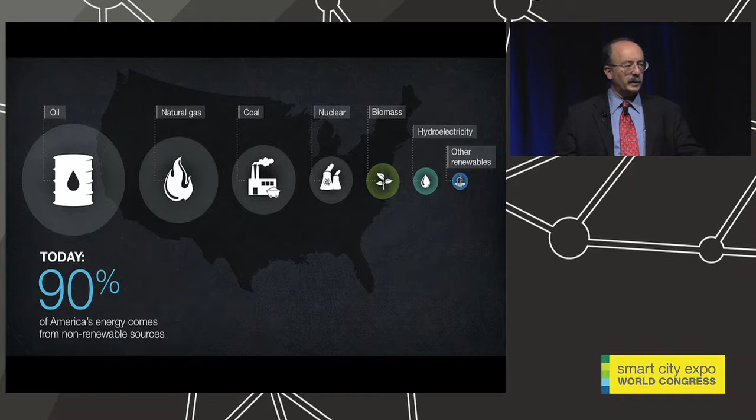4/5 of the world's energy still comes from burning each year 19 cubic kilometers of the rotted remains of primeval swamp goo. As a National Petroleum Council member, I should tell you, and it's true, that those fossil fuels have built our civilization and created our wealth and enriched the lives of billions of people. But their rising costs to our security, health, environment, economy are eroding, if not outweighing their benefits. So we need a new fire.

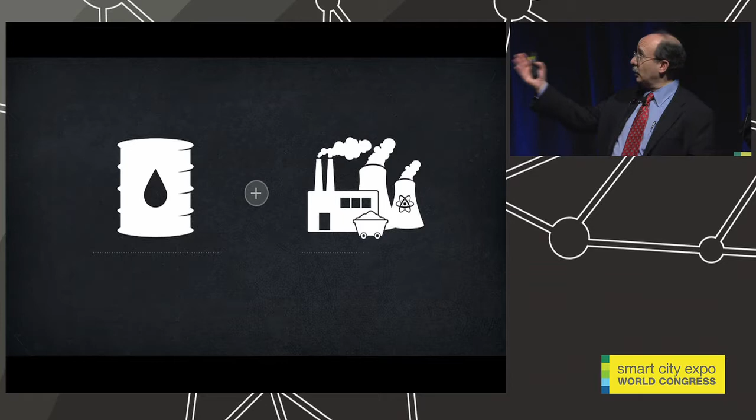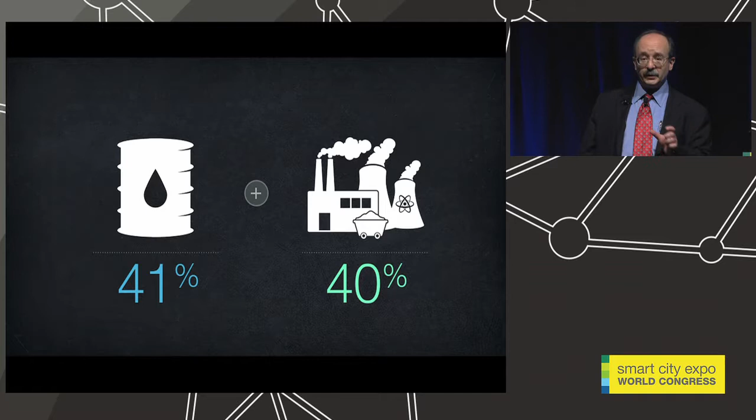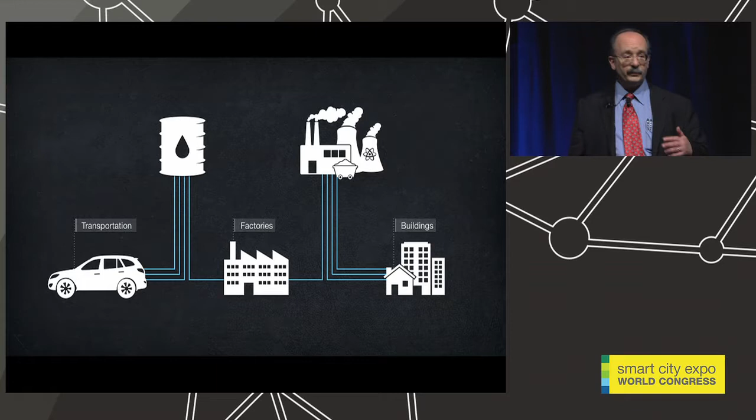And switching from the old fire to the new fire changes 2 big stories, oil and electricity, each of which puts 2/5 of the fossil carbon into the air. These are distinct stories. In my country, they're less than 1% linked, but the uses are similarly concentrated. 3/4 of US oil fuels transportation, 3/4 of US electricity powers buildings, the rest of both runs factories. So very efficient transport and land use and buildings and factories can save a lot of oil and coal and natural gas to displace both.

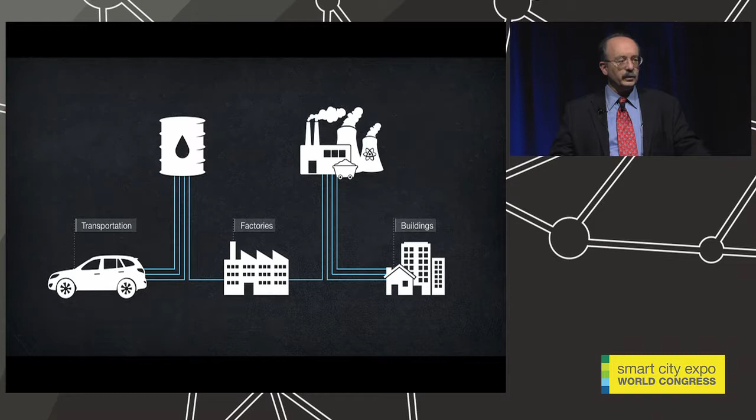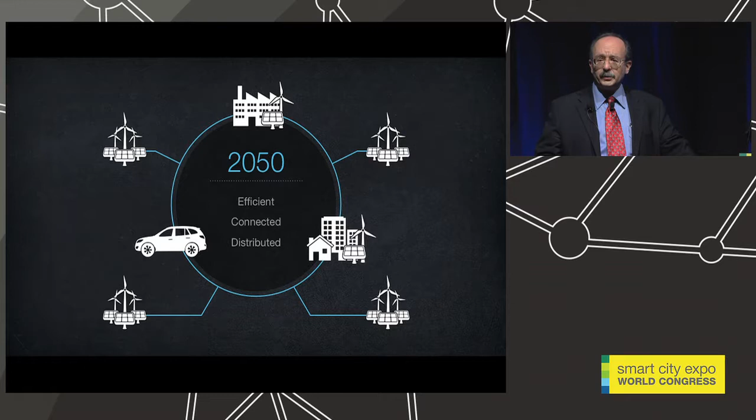But today's energy system is not only inefficient, it's also aging, dirty, and insecure and disconnected, and it needs refurbishment. But by 2050, it could become efficient, connected, and distributed with elegantly frugal vehicles, buildings, and factories, all depending on a secure, modern, and resilient electricity system. So we can eliminate our addiction to oil and coal by 2050 and use 1/3 less natural gas while switching to 3-fold more efficient use and 3/4 renewable supplies.

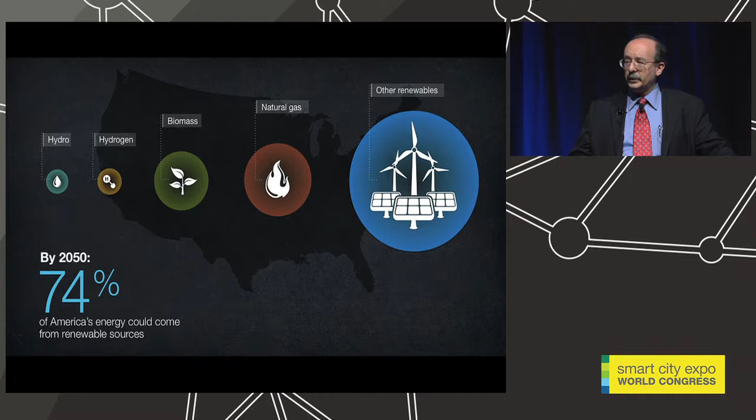That's the transition I'll describe for the United States, but I work in 50-odd countries, and I think you'll find that the US solutions have considerable resonance, opportunity, adaptability to many other societies. Now, by 2050, we found that this transition in the United States, for example, could cost $5 trillion less in net present value than business as usual, counting all external or hidden costs at 0, a conservatively low estimate. And yet this cheaper energy system could support a 158% bigger economy, all without needing oil or coal, or for that matter, nuclear energy.

And this transition would need no new inventions and no acts of Congress, running around Washington gridlock, because instead it's led by business for profit. It uses our most effective institutions, private enterprise co-evolving with civil society, sped by military innovation, to go around our least effective institutions. And whether you care most about profits and jobs and competitive advantage, or about national security, or about environmental stewardship, creation care, public health, climate protection, strong communities, reinventing fire makes sense and makes money.

Now, General Eisenhower reputedly said that expanding the boundaries of a tough problem makes it soluble by encompassing more options and more synergies, including what the solution requires. So in Reinventing Fire, we integrated all 4 sectors that use energy: transport, buildings, industry, and electricity. And we integrated 4 kinds of innovation, not just the usual 2, technology and public policy, but also 2 even more powerful ones normally left out, namely design, the way we combine technologies, and strategy, new business models, new competitive strategies. And these combinations give much more than the sum of their parts, especially in creating some deeply disruptive business opportunities.

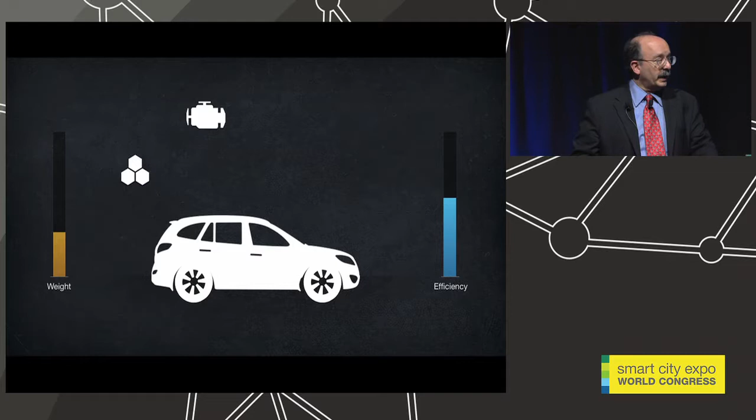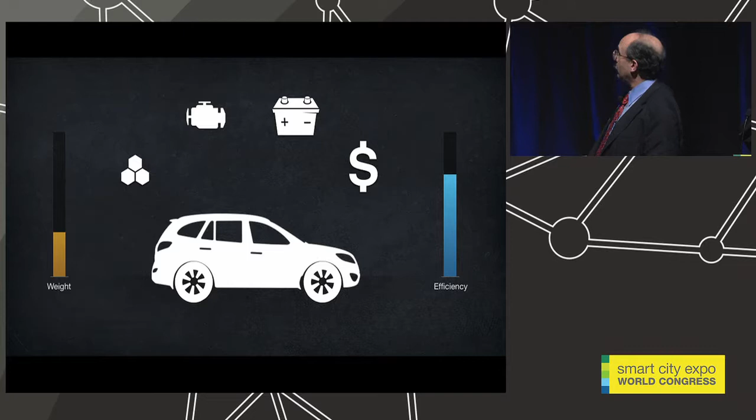Happily, today we have ultralight, ultra-strong materials like carbon fiber composites that can make dramatic weight savings snowball and can make autos simpler and cheaper to build, as I'll explain. And lighter, more slippery autos need less force to move them, so their engine gets smaller. And then you can afford to electrify them because you need about 3 times fewer of the costly fuel cells or batteries. So they get smaller, lighter, and cheaper, and the price of the car converges towards today's value, while the driving cost per kilometer gets much smaller.

So that specific sequence of innovations can transform automakers from wringing tiny savings out of essentially Victorian steel stamping and engine technologies to the steeply falling costs of 3 mutually reinforcing technologies: the ultralight materials, their manufacturing techniques, and electric propulsion. And if you are exploiting 3 steep and synergistic learning curves while your competitor is out on the flat part of one learning curve, you win. This also turns out to de-risk the auto business very substantially.

Now, sales of ultralight electric autos can grow faster and their costs can drop faster with a public policy called feebates, temporarily. That means rebates for efficient new autos paid for by fees on inefficient ones. In its first 2 years, the biggest of 5 European feebate or bonus-malus systems tripled the speed of improving auto efficiency. That was in France.

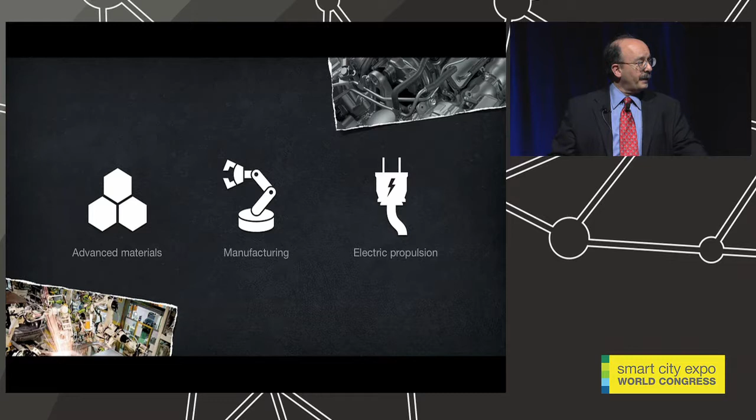And the resulting shift to electric autos is going to be as game-changing as shifting from small refinements in typewriters to the dramatic Moore's Law-driven gains in computers. And of course, IT is now our biggest industry. Typewriter makers have vanished. So vehicle fitness, taking the obesity out of the car, opens up a powerful new automotive competitive strategy that doubles the expected oil savings in 40 years, but also makes affordable the electrification that can save the rest of the oil.

Many different countries could lead this next automotive revolution. The formidable barriers are much more cultural than they're technological or economic, and we're helping both the automakers and the supply chain to tackle them. The current leader is Germany. This year, Volkswagen began ramping up low-volume production of this two-seat carbon fiber plug-in hybrid getting 0.9 diesel liters per 100 kilometers.

And BMW began ramping mid-volume production of this carbon fiber battery electric car. They said its carbon fiber is paid for by needing fewer batteries, and their CEO said, "We do not intend to be a typewriter maker," because he can look across München to where Olympia used to make excellent typewriters. Audi recently showed a carbon fiber plug-in hybrid concept vehicle rated like this one at 0.9 liters per 100 kilometers, but it's an SUV.

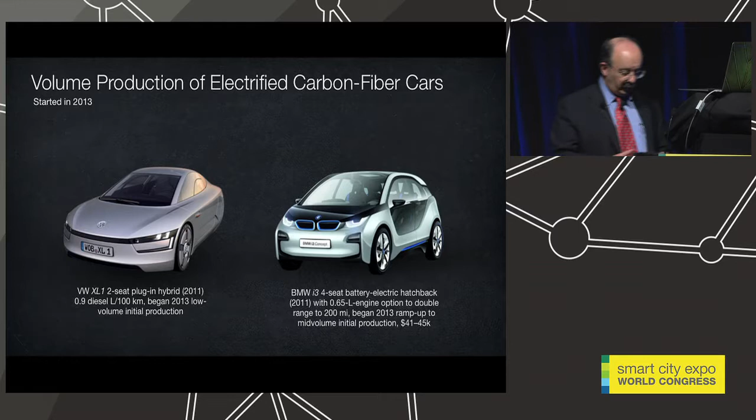Now, 7 years ago, an even faster and cheaper technology developed by one of our spin-offs made this carbon cap in less than 1 minute. And if I hit it, you can tell it's extremely strong and stiff. Rings like a bell. So it's stronger and stiffer than steel, a third the weight, tougher than titanium. Tom Friedman, the journalist, hit it as hard as he could with a sledgehammer and couldn't even make a mark on it. So don't worry about dropping it.

And I brought along another piece that was recently made that's induction welded. And it's now possible to make a 2 by 2 meter complex part with such techniques in 1 minute. So such techniques, which are, in various forms, available now from 17 firms, can scale to automotive cost and speed with essentially aerospace performance. Adoption could save 4/5 of the capital needed for automaking and could save a lot of lives because these materials can absorb 6 to 12 times as much crash energy as steel per kilo.

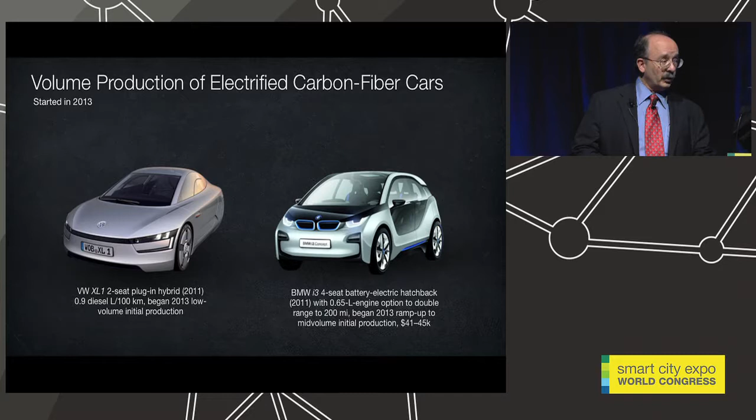And they could save oil equivalent in the US alone to 1.5 Saudis or half an OPEC that we would find by drilling in a very prospective play called the Detroit Formation. There's a lot of negabarrels down there, and they cost $18 a barrel because it's just to pay for the electrification. The ultralighting is essentially free, paid for by simpler automaking and a much smaller powertrain. And of course, the negabarrels are domestic, secure, carbon-free, and inexhaustible.

The lightest announced carbon fiber family car is this plug-in hybrid concept car that Toyota showed 6 years ago. It has the interior volume of a Prius, half the fuel use, 1/3 the weight, 420 kilograms. And that, I think, is a sign of things to come.

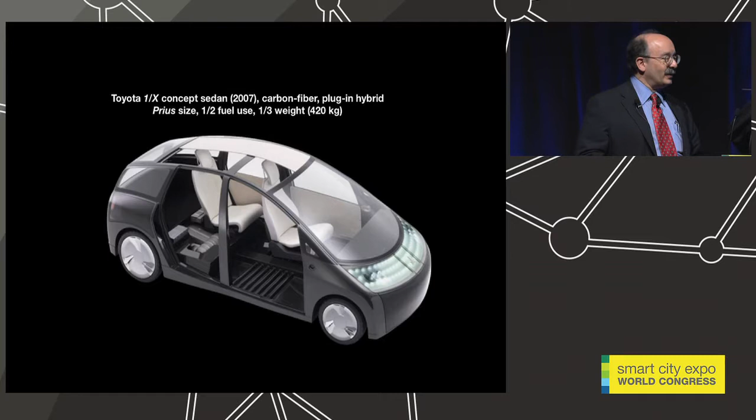Now, the same physics and the same business logic apply also to heavy vehicles. Walmart last year used 44% less fuel than in 2005 to move a case in its giant fleet of heavy trucks. And the full technological potential to improve the Class 8 trucks is a tripling of efficiency. If you combine that with the tripled to quintupled efficiency airplanes being designed at places like Boeing and NASA and MIT, then the US would save nearly $1 trillion worth of fuel on the heavy vehicles.

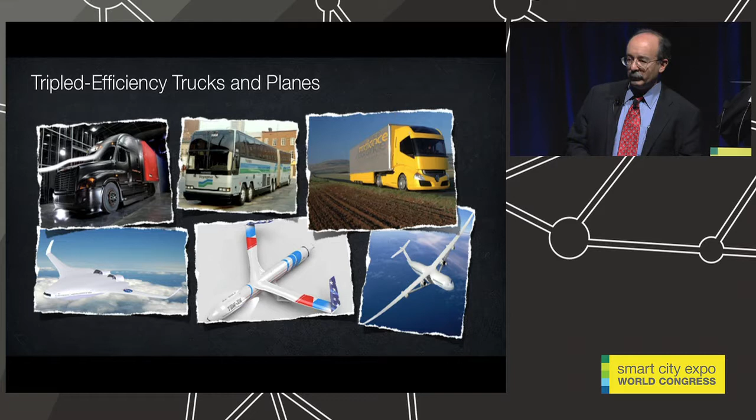And in both light and heavy vehicles, these technical revolutions in efficiency are being driven by the military revolution in efficiency. It's going to make that faster, much as military R&D already gave us the internet, the global positioning system, the jet engine industry, the microchip industry. Only this time it will be leveraging oil savings in the civilian sector, which uses over 50 times as much oil, and that will help get big oil-guzzling countries like mine off oil much faster so that we needn't fight over the oil, and then our warfighters can have negamissions in the Persian Gulf, mission unnecessary. They really like that idea.

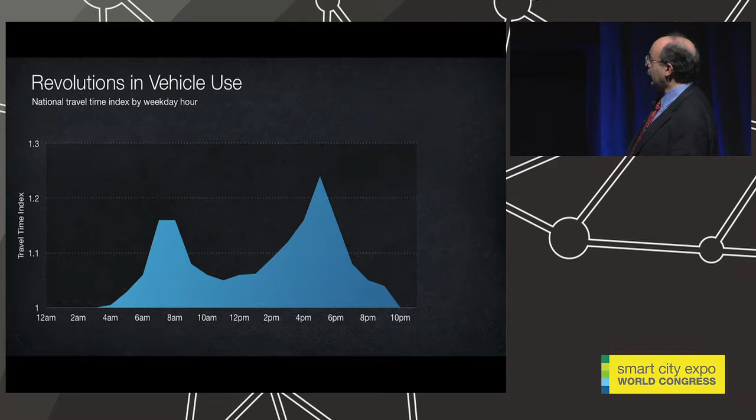But instead of just standing back and watching driving double as officially forecast, we could eliminate needless driving by combining 4 very powerful techniques. Namely, we can charge real-time driving costs per kilometer, not per liter. We can use smart IT to enhance public transport and empower car sharing and ride sharing and smart parking. We can allow lucrative smart growth real estate models that help people be already where they want to be so they don't need to go somewhere else. And that's more profitable for the developer. And we can also use IT to make traffic free flowing.

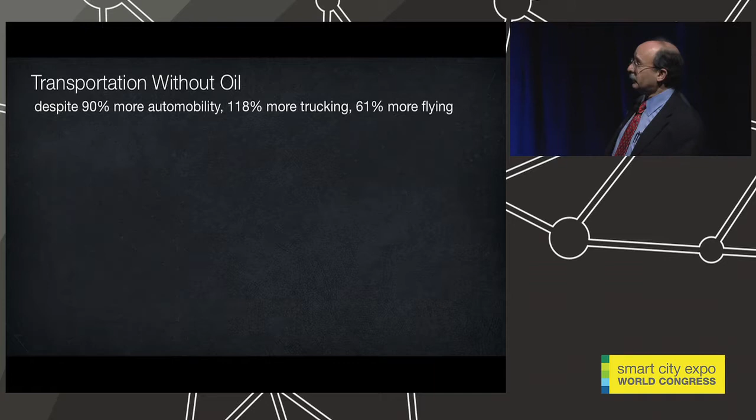So by combining those proven methods, the US could get the same access and mobility or better with 46 to 84% less driving, saving another $0.3 trillion, plus another $0.3 trillion from smarter use of trucks. So 40 years from now, a much more mobile US economy could be using no oil, and saving or displacing each barrel for $25 a barrel rather than buying it for way over $100 a barrel saves $4 trillion net present value. Or if we counted just the hidden economic and military costs of US oil dependence, that would be $12 trillion. And that still doesn't count any costs to health, safety, environment, climate, global stability and development, or our nation's independence and reputation.

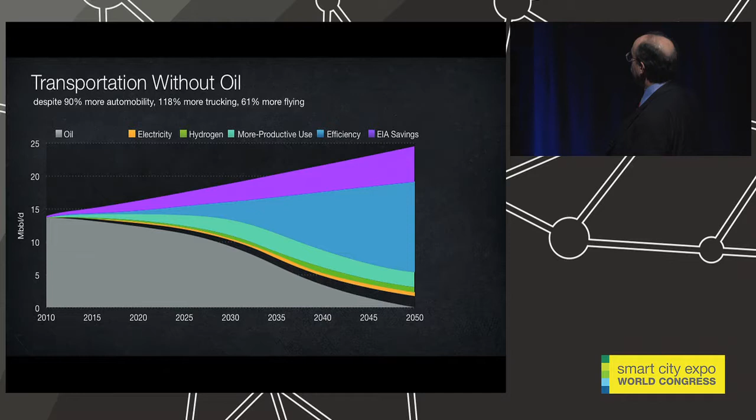So to get mobility without oil, to phase out the oil, we can first get efficient, adding to the government forecast savings the new ones from vehicle fitness and more productive use of vehicles. And then those 1 or 2 liter per 100 kilometer autos can run on any mixture of hydrogen, electricity, and advanced biofuel. The heavy trucks and airplanes could realistically run on advanced biofuel or hydrogen, or the trucks could run on natural gas, but none of them will need oil. And the needed biofuels, if any, are such a small number they could be made 2/3 from waste and without needing any cropland or harming soil or climate.

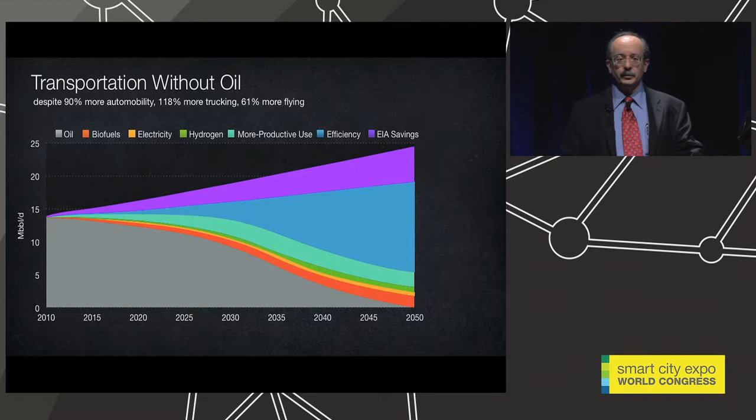So our little team speeds these oil savings by what we call institutional acupuncture. If the business logic is congested and not flowing properly, we insert little needles into selected points in partners like Ford and Walmart and the Pentagon to get that chi, that entrepreneurial juice, flowing properly. And this long transition is well enough underway that even 4 years ago, some analysts were starting to see peak oil not in supply but in demand.

Because as happened to whale oil in the 1850s, oil is becoming uncompetitive even at low prices before it becomes unavailable even at high prices.

But the electric autos that help that happen need not add new burdens to the electricity system. Rather, when smart autos exchange electricity and information through smart buildings with smart grids, they add flexibility and storage that help the grid accept varying solar and wind power. So it becomes easier to solve the auto and electricity problems together than separately.

And the electric autos also converge the oil story with our second big story: saving electricity and then making it differently. These twin revolutions in electricity promise more numerous, diverse, and profound disruptions than in any other sector, because we've got 21st century technology and speed colliding head-on with 20th and even 19th century institutions, rules, and cultures.

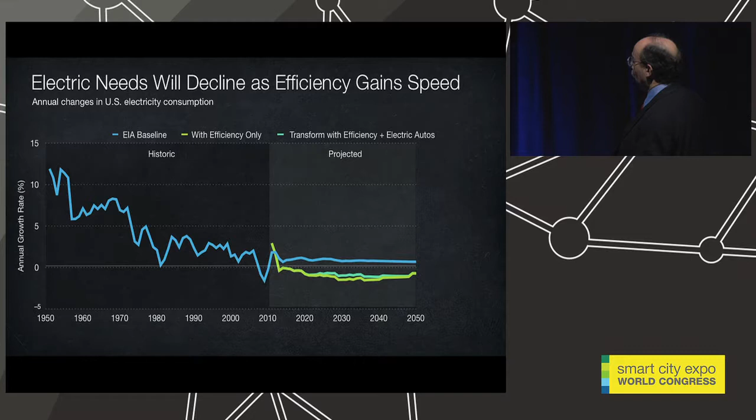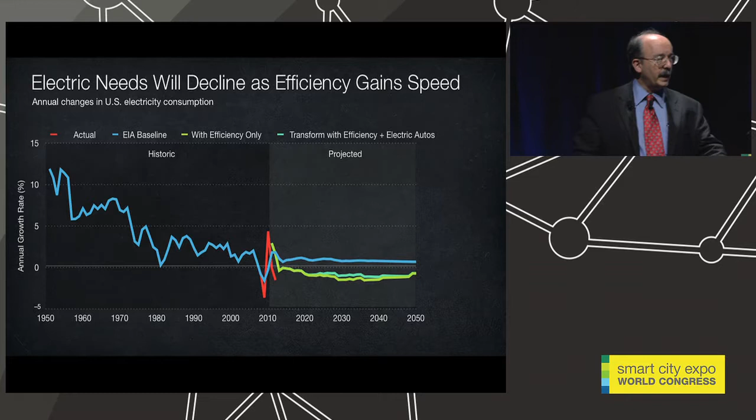Something like this, only more so, seems to be already happening, because last year alone in the United States, the weather-adjusted electricity used to make a dollar of real GDP fell by 3.4% in one year. Unprecedented. But we can keep demand dropping by reasonably accelerating existing trends.

Over the next 40 years, US buildings, which I'll remind you use three-quarters of our electricity, could triple or quadruple their energy productivity, saving $1.4 trillion net present value with a 33% internal rate of return. The savings are worth 4 times their costs.

And industry can also accelerate and double its energy productivity with a 21% internal rate of return. So to do those things by 2050, we would just need, by 2030, to ramp up the national average levels of efficiency adoption to what our Pacific Northwest states already achieved 8 years ago.

There is a disruptive innovation we call integrative design that can do even better, because it often makes very large energy savings cost less than small or no savings, turning diminishing returns into expanding returns.

That's how our retrofit 3 years ago is saving two-fifths of the energy in the Empire State Building. We started off by remanufacturing all 6,500 windows on a temporary 5th floor window factory into super windows that are 3 times more insulating and let light come through but block heat. Those plus other improvements...

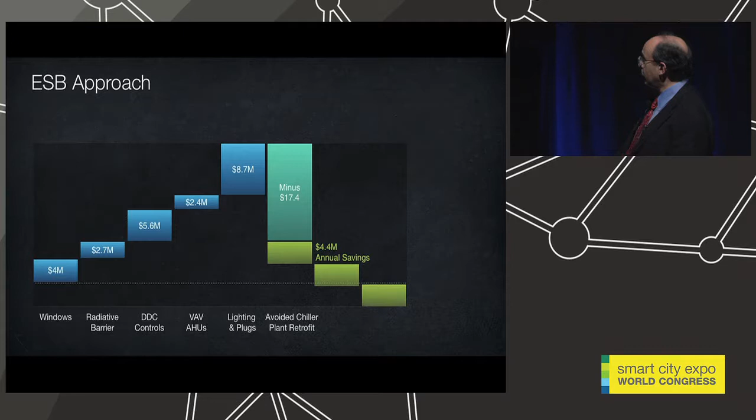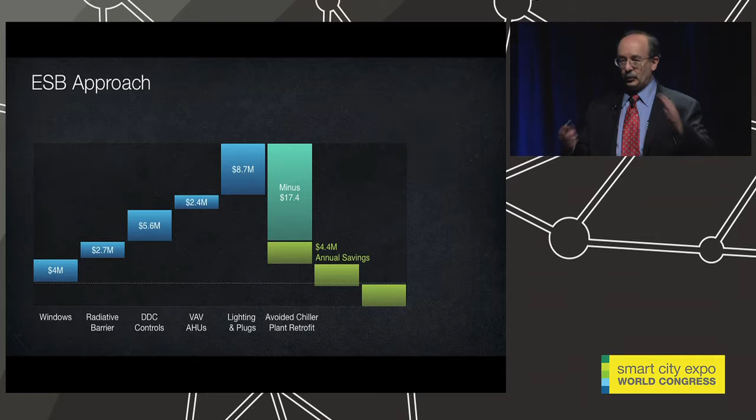By the way, a major energy service company had also offered a 3-year payback, but their savings would be 6 times smaller, because they did disintegrated design, optimizing components separately, while we optimized the whole building as a system.

We've just finished the cost-effective retrofit of a difficult 48-year-old federal office building, which is expected to cut energy use by 70%, making it probably more efficient than the most efficient new US office building. That's how fast the state of the art is moving.

Now let's look at a different sort of building. My wife Judy and I live in this house at 2,200 meters elevation near Aspen, Colorado, high in the Rocky Mountains, where the lowest temperature could be as low as minus 44 Celsius, and we've had up to 39 days of continuous cloud in midwinter.

This is actually an archetype that helped inspire the 30,000 or more European passive buildings, which, like ours, have and need no heating system, but have roughly normal construction cost. And they can look like whatever you want — they don't need to look like this to work like this.

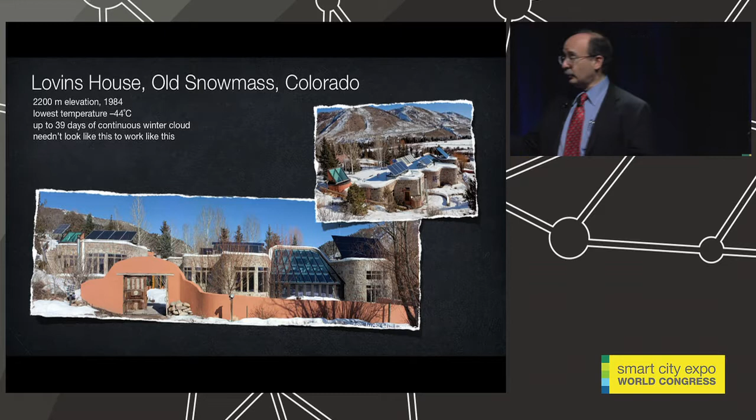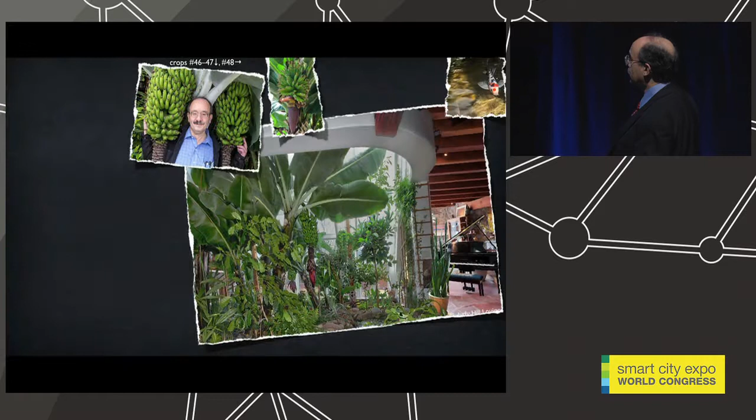Now, let's come into this central atrium, and under the special glass, which insulates like 14 sheets of glass, this is what the middle of the house looked like in a February snowstorm 2 years ago. You can see 2 of the 5 banana crops that were then ripening with no heating system.

In fact, here's our new banana crop number 48. Here's number 46 and 47. Passive solar banana crops — these actually weighed 30 kilos and harvested themselves in March or so by pulling down the tree.

Now, when I moved into this house in 1984, it was saving about 99% of the usual space and water heating energy, about 90% of the household electricity, and about half the water. And it was all paying for itself in the first 10 months.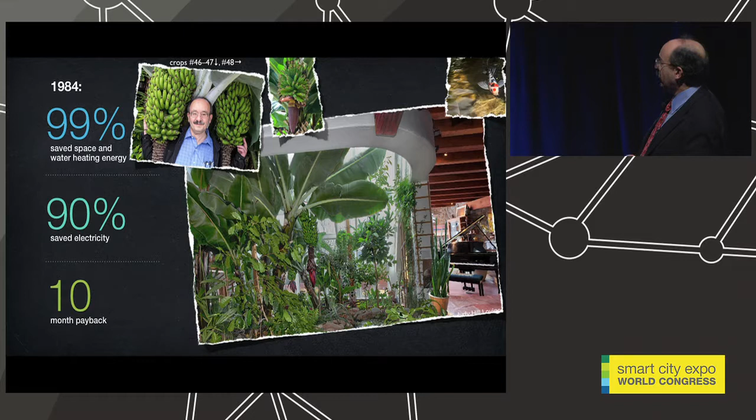That was using 1983 technology. Well, today's is a lot better, so we've now retrofitted it, and we're measuring about 300 data streams to see how much better. The trouble is that the measuring equipment seems to be using more electricity than the lights and appliances we're measuring.

A similar design has been used to eliminate air conditioning up to 46 Celsius, not a limit, with better comfort and lower construction cost. And it's been used in steamy Bangkok to save about 90% of the air conditioning energy with normal construction costs and lower and better comfort.

So probably almost everyone in the world lives in a climate somewhere between Bangkok and this place in Colorado. But wherever you are, the key is to get multiple benefits from single expenditures. So this white arch holding up the middle of our house has 12 different functions, but only one cost.

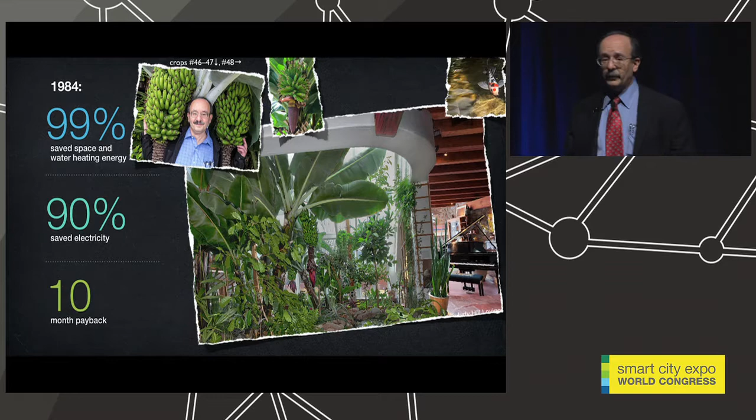Integrative design can also increase the $500 billion of conventional energy savings in US industry. Dow has already captured $9 billion of energy savings on a $1 billion investment. But there's much more to do.

For example, 3/5 of the world's electricity runs motors, half of that runs pumps and fans, and we can make motors, pumps, and fans much better. But first we should capture bigger and cheaper savings that are normally ignored and are not yet in any of the engineering textbooks. For example, the biggest user of motor power is pumping, moving liquids through pipes.

But a standard industrial pumping loop was redesigned by a Dutch colleague to use at least 86% less pumping energy, not by improving the pumps and motors and controls, but just by replacing long, thin, crooked pipes with fat, short, straight pipes. And in the process, the pumping equipment gets smaller and the total capital cost goes down.

Actually, we did something like this in some new piping in our own house and saved 99% or so of the pumping energy at lower cost. So this is not new technology. This is just rearranging our metal furniture as designers, rediscovering Victorian engineering.

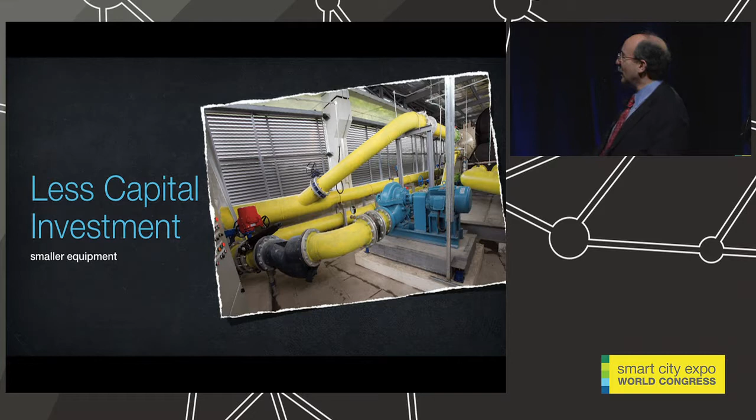And what does this mean for the electricity that's 3/5 used in motors? Well, if you put 100 units of, say, coal into the power plant, there are so many compounding losses that only 1/10 of that energy comes out the pipe as flow.

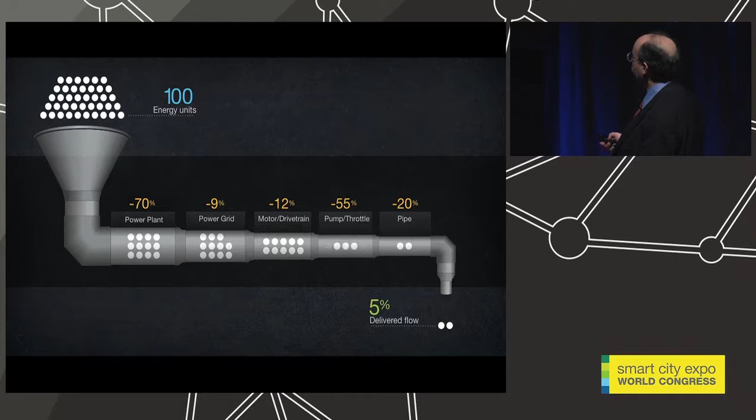But now we can turn those compounding losses around backwards from right to left, and they become compounding savings. And when we save 1 unit of flow or friction in the pipe, it compounds back again to save 10 units of fuel and cost and pollution back at the power station, as well as what Hunter Lovins calls global weirding. And at the same time, the components, as you go upstream, get smaller and cheaper.

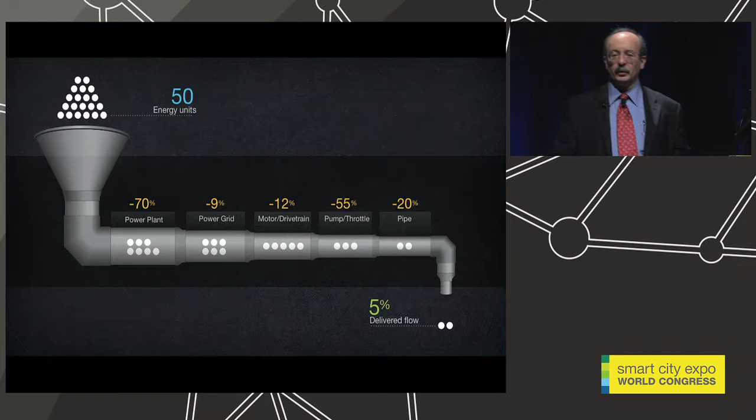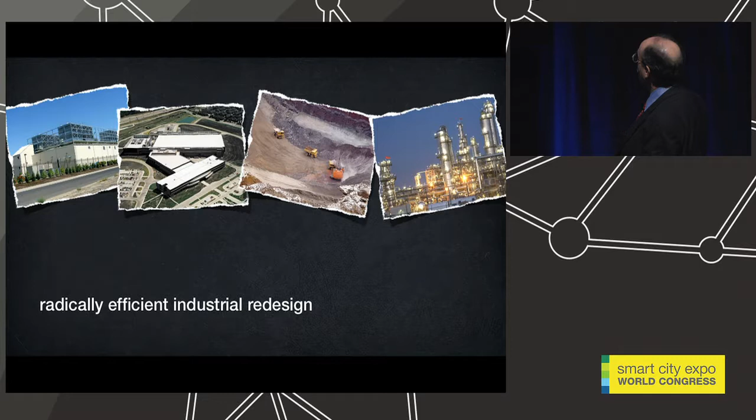Now, our team has lately found such snowballing energy savings in over $40 billion worth of diverse industrial redesigns, from a Hewlett-Packard data center and Texas Instruments chip fab to Rio Tinto and Anglo-American mines and Shell hydrocarbon facilities and many others. And typically our retrofit designs can save about 30 to 60% of the energy with a 2 or 3 year payback. And our new facility designs save a bit more, say 40 to 90 odd percent, but almost always at lower capital cost.

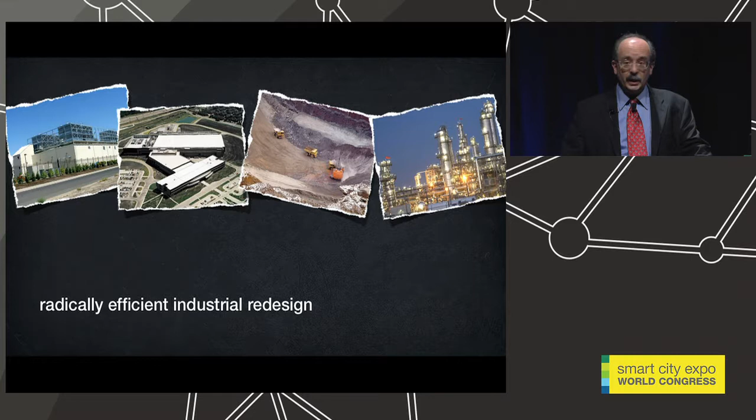That's even though they're generally subsidized less than non-renewables are. In Germany, the installed solar power systems cost only half what they cost in the United States. We all buy the same equipment, but the German installers are much more efficient.

And therefore, today, even at twice the German price, remarkably, in at least 20 of the United States, entrepreneurs can come to your house and put solar power on your roof with no down payment and beat your electric bill. Soon the no down payment, no money down, will turn into cash back as the costs continue to fall.

And such unregulated products could ultimately add up to a virtual utility that could bypass the electric company, just as wireless phones bypass the wireline telephone companies. This gives electricity executives nightmares and venture capitalists sweet dreams.

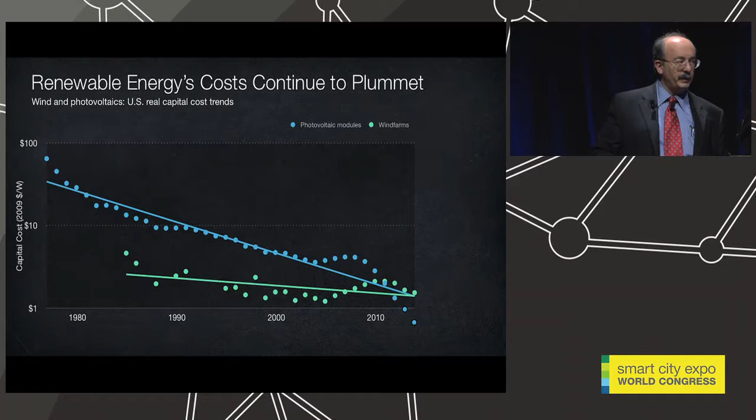And these are very large numbers because electricity production has become a scalable, mass-produced, manufactured product, much more like microchips and computers than like building cathedrals.

We used to think you had to take 10 years and billions of dollars to build a power station. But now in those 10 years, you can build each year a photovoltaic factory, which each year thereafter will produce enough solar cells that each year that one factory's production for 1 year worth of solar cells will produce as much electricity as your big power plant would have produced.

So that's why solar cells are scaling faster than cell phones. The capacity to make them is now about 75 billion watts a year, twice the installation rate, although it's going to catch up quickly thanks to China.

And worldwide, in each of the past 2 years, these modern renewables, not counting big hydro, have got $250 billion of private investment and added over 80 billion watts of capacity.

They've already surpassed, 2 years ago, the total installed capacity of nuclear power in the world. Its dwindling annual net additions actually went negative before Fukushima. And worldwide, the orders for nuclear and coal plants are dwindling because they have no business case.

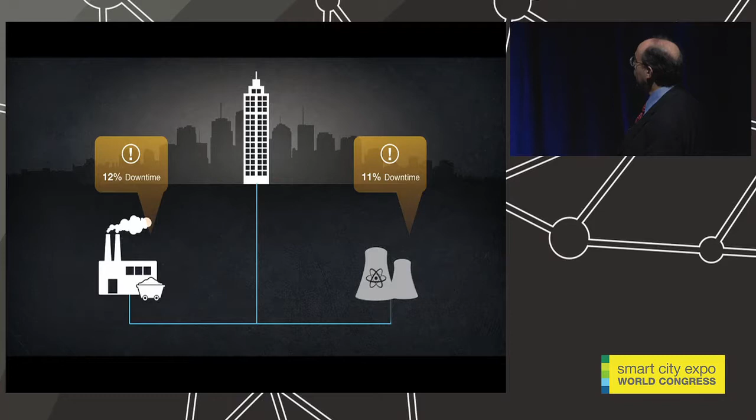Also, no generator is 24/7. They all break. And when a giant unit fails, as they do maybe 1/8 of the time, you suddenly lose 1,000 megawatts in milliseconds, often for weeks or months, and often without warning. That's why we've always designed the grid to back up failed plants with working plants, to cope with this intermittency of the big thermal plants.

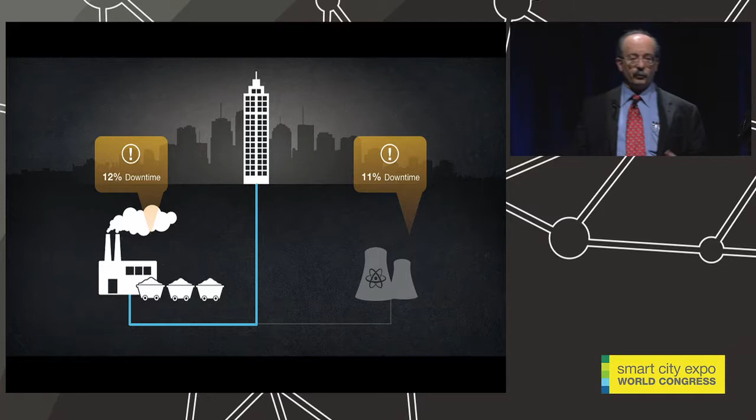And in exactly the same way, the grid can manage the forecastable variations in photovoltaic and wind power. That is, you diversify the portfolio of these variable resources by type and location, you forecast them, you integrate them with all the other renewables, which are dispatchable, that means you can have them whenever you want, you integrate them with demand response, you integrate them with distributed storage, and that's enough without bulk storage.

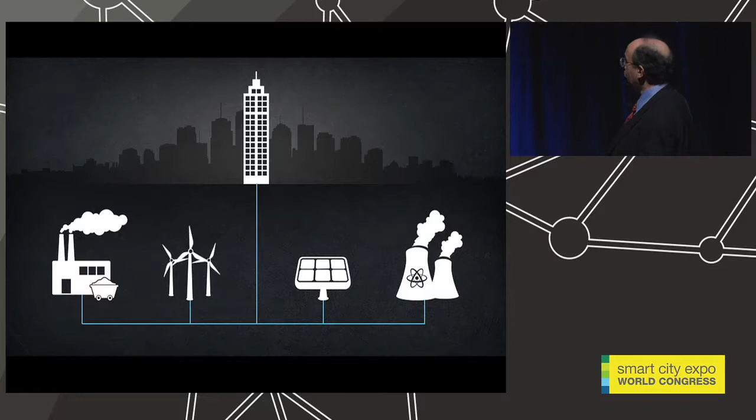Let me illustrate this with a rather difficult case for the power pool that serves the state of Texas and is isolated from the rest of the United States. In 2050, you would expect during a summer week to have a load shape like this, or less peaky if you use the electricity in a way that saves money.

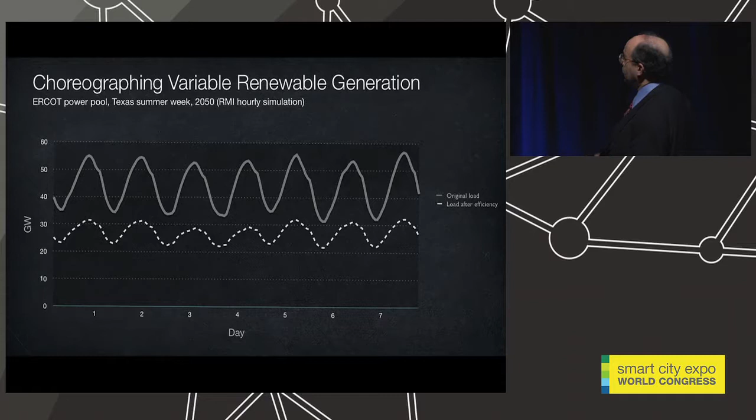Now, let's meet all of this with renewables. First with wind, then with solar power, and you can see how much they actually vary.

And then, having done 86% of the generation in this way, we'll do the other 14% with dispatchable renewables that can run anytime, like geothermal, small hydro, solar thermal electric with heat storage so they can run into and even through the night, burning municipal solid waste, burning energy crops, burning feedlot biogas in combustion turbines.

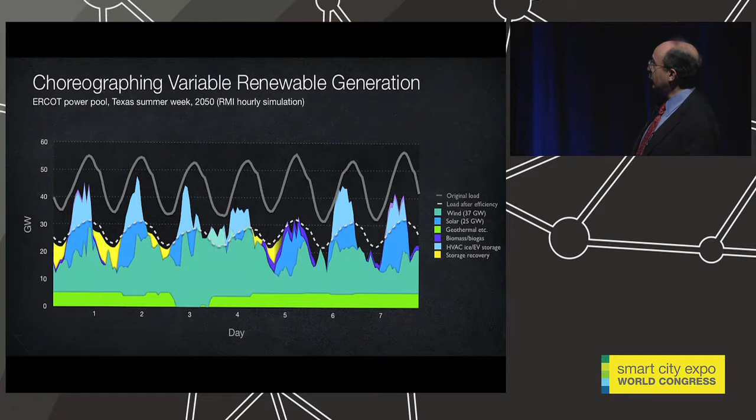So now we're 100% renewable, but you can see it doesn't match the load shape very well. But now we can take the surpluses and put them into two kinds of distributed storage, both fully deployed, namely ice storage, air conditioning, and smart charging of electric vehicles. Then we can recover that distributed storage when we want it and fill in the last bits with unobtrusively flexible demand.

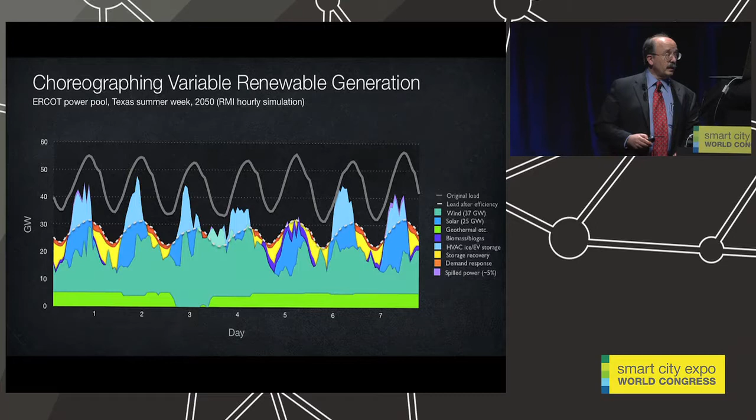Now, some utilities already are doing this. It's not just theory. They're doing this choreography of variable renewables. Last year, Germany had 23% renewable electricity and Denmark 41%, and they had the most reliable power in Europe, about 10 times the reliability of the United States electric system.

The first half of this year, Spain has been 48% renewable electricity, and Portugal a remarkable 70%, up from 17% in just 8 years.

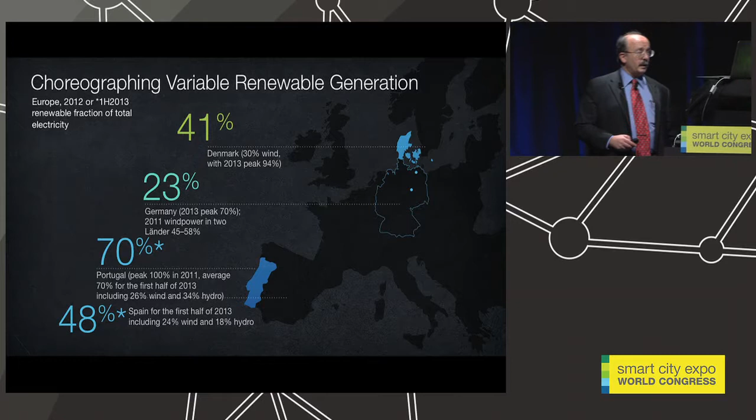Now the European vision of all renewable electricity is starting to look realistic and has been adopted or achieved as a goal in at least one sector, sometimes in all, by 8 countries, 42 cities, 49 regions, 8 utilities, 21 institutions.

A sixth of Germans already live in communities or regions that expect to have all renewable electricity or that already do. Now, Denmark illustrates another important part of this story.

Over 30-odd years, they've gone from a few centralized coal plants to a constellation of wind power, 86% owned by the farmers, just as two-thirds of German renewables are owned by citizens and communities. And the rest of the Danish capacity is combined heat and power running on agricultural wastes in general.

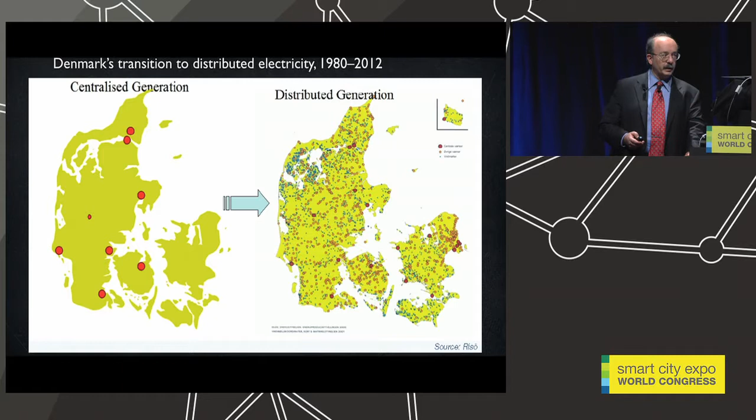And Denmark's conservative government is planning and on track to achieve wholly renewable energy, not just electricity, but all kinds, by 2050 at essentially no extra cost. And Denmark is also reorganizing its grid into microgrids, a cellular architecture that can make cascading blackouts impossible.

Now, in America, we have this aging, dirty, and insecure electricity system that we must replace by 2050. And whatever we replace it with will cost about the same, about $6 trillion net present value. Whether we buy more of what we now have, or new nuclear and so-called clean coal, or centralized renewables, or more distributed renewables, they all cost about the same, but they differ profoundly in their risks around security, technology, finance, fuel, water, climate, and health.

So this is a risk management play. For example, our over-centralized grid is vulnerable to cascading and potentially economy-shattering blackouts caused by operational problems, bad space weather, bad earth weather, earthquakes, physical attack, cyber attack.

But this blackout risk disappears, and all the other risks are best managed with distributed renewables reorganized into microgrids that normally exchange power freely but can stand alone at need. So they can disconnect fractally, reconnect seamlessly.

Our house works this way. The lights stay on whether the grid is working or not. This is also the Pentagon strategy for military power supply because they need their stuff to work. Well, how about the rest of us whom they're defending? We need this level of security too, national, community, and individual.

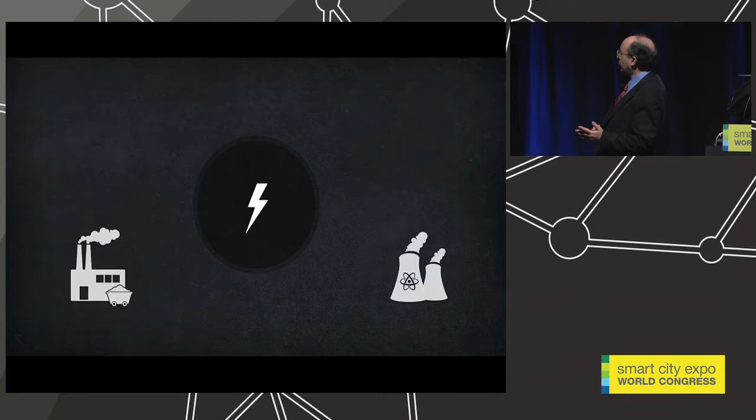So let me summarize the electricity story. Electric companies just used to build giant coal and nuclear and sometimes gas plants and a little bit of efficiency in renewables, especially when we rewarded those companies, as we do throughout Europe and in 35 of the United States, for selling us more electricity.

But where we've changed the rules in 15 states to reward the utilities for cutting our bills, not for selling us more electricity, the investment goes the other way up. It shifts massively towards efficiency, renewables, combined heat and power, distributed storage, smart grids, ways to blend them all together reliably.

And especially this is true in the 30 or so United States where all ways to save electricity or to use it at more convenient times bid into the same auctions as electricity supply. And in our biggest power pool, there was a recent auction where the demand side options got 94% of the winning bids.

So our energy future is not fate but choice, and that choice is very flexible. In 1975, in my country, government and industry all insisted that the energy needed to make $1 of gross domestic product could never go down. So it was considered heretical when I said it could actually go down threefold.

How did we do? Well, it's gone down by over half so far. And today, with much better technologies costing 3 times less for efficiency, and with integrative design and better financing and marketing and delivery channels, we can see very clearly how to save two-thirds of what's left at even lower cost.

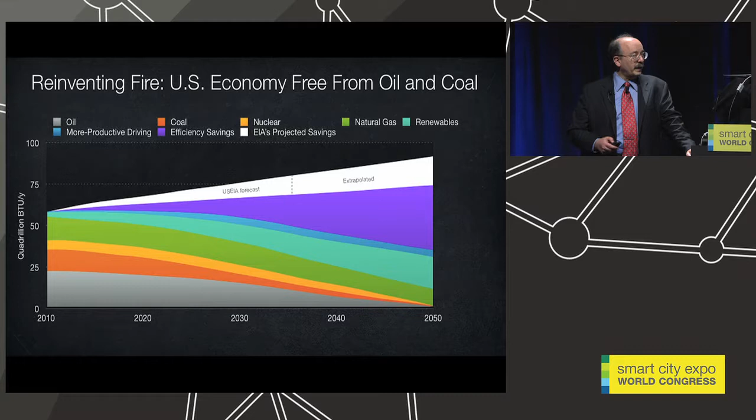So now combine the electricity and oil revolutions, and you have the really big story, Reinventing Fire, where business enabled and sped by smart policies in mindful markets can lead a country like the United States, and perhaps your country, completely off oil and coal by 2050, saving trillions of dollars, growing the economy 2.6-fold, and by eliminating the oil and coal, cutting fossil carbon emissions by 82 to 86%.

Now, if you like any one or more of those outcomes, you could support this transition without having to like every outcome and without having to agree about which outcome is most important. So focusing on outcomes, not motives, can turn gridlock and conflict into a unifying solution to our common energy challenge, and can also provide the most effective solutions to the big global problems that put at risk every country's security and prosperity.

At our nonprofit Rocky Mountain Institute, we're helping smart companies to get unstuck and speed this journey through a variety of sectoral initiatives and projects.

Of course, there is still a lot of old thinking around too, on both sides of the Atlantic and Pacific. As the former oilman Maurice Strong said, not all the fossils are in the fuel. But as Ed Woolard said when he led DuPont, he was chairman, firms hampered by old thinking won't be a problem, because in the long run, he said, they simply won't be around.

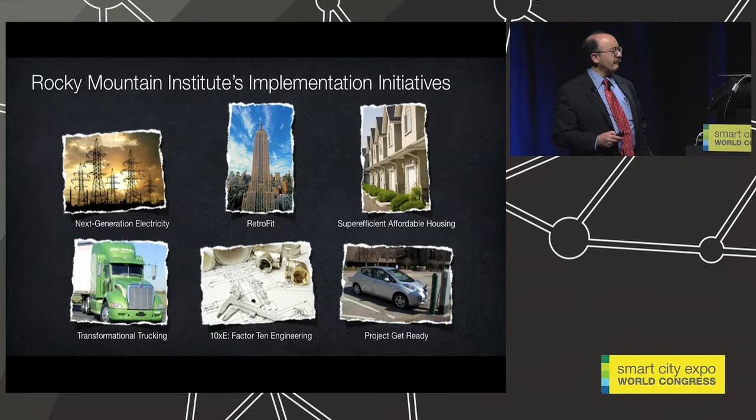What I've described here is not just a once-in-a-civilization business opportunity. It's one of the greatest transformations in the whole history of our species, because we humans are inventing a new fire, not dug from below, but flowing from above.

I've even heard theologians talk about energy from hell and energy from heaven. And the new fire is quite different. It is not scarce but bountiful, not local but everywhere, not transient but permanent, not costly but free. And except for the transitional tail of natural gas and a little biofuel grown in ways that sustain and endure, this new fire is flameless.

And efficiently used, it really could make energy do our work without working our undoing. Every nation, firm, city, community, citizen owns a piece of that enormous prize. And our book, Reinventing Fire, details how to capture that opportunity.

And now Rocky Mountain Institute has partnered with 3 leading organizations that are in or closely collaborating with the central government of China to bring this thinking into China's strategic planning process and to learn from China's remarkable experience. So with the conversation begun at reinventingfire.com, let me invite each of you to engage with us, with each other, with everyone around you, to help make the world healthier, richer, fairer, cooler, and safer by together reinventing fire. Thank you for your good work and your kind attention.